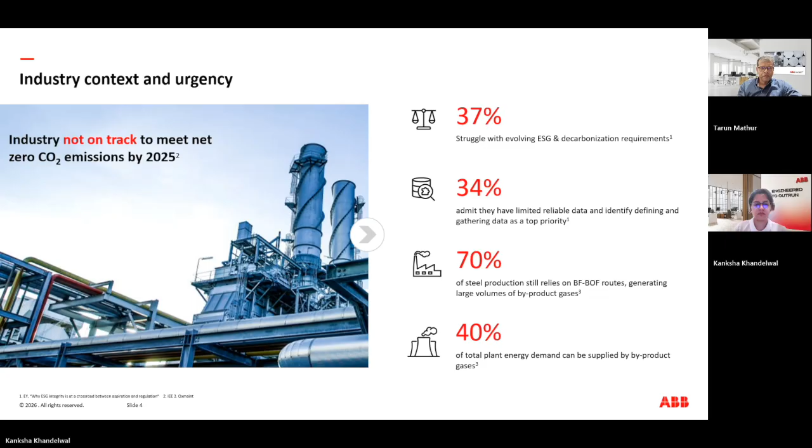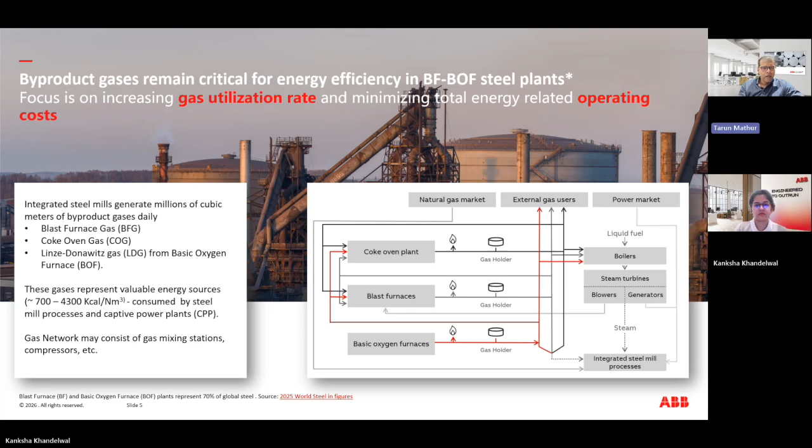The objective is simple: utilize as much internally generated gas as possible and minimize dependence on purchased fuels and electricity. However, gas generation and consumption are constantly changing based on process conditions and the periodic events that happen during the processes. This makes balancing the network a highly dynamic problem, and that brings us to the value leakage that exists in most plants today.

At the core, all value loss comes from one issue: imbalance between gas generation and consumption. This can happen in a couple of ways. One case is excess supply, when generation exceeds demand, gas holder levels rise, pressure increases in the network, and eventually gas has to be flared. This leads to direct loss of useful energy, which has to be replaced by purchased fuel, and it results in higher emissions as well.

Case two is a shortage of gas. When the gas supply is insufficient, the plant switches to natural gas or LPG, and this results in higher and volatile energy cost or a suboptimal fuel mix. Importantly, this can happen even in plants that flare gas at certain times, while at other times they have to use purchased fuels as well.

On top of this, decisions are mostly manual, based on operator experience and limited visibility across the network, which leads to delayed response, conservative decisions, and suboptimal gas allocation. So overall, value is lost through flaring in excess gas scenarios, fuel purchase during shortage, and inefficient decision making in between.

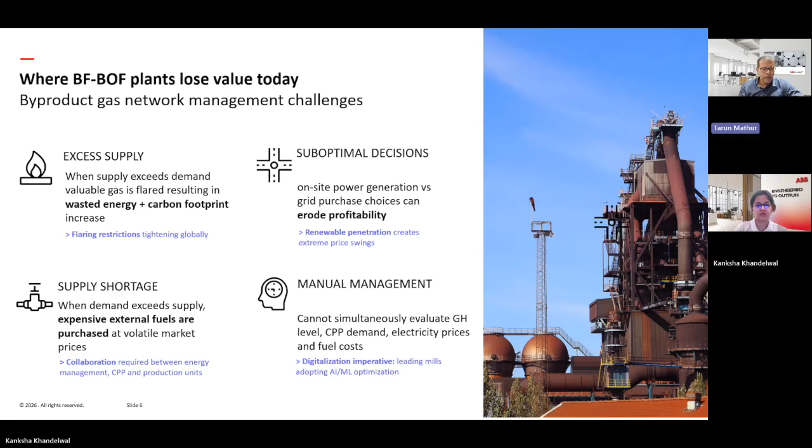Let's have a look at some real-world scenarios and how this happens in real time. Scenario one is when a blast furnace gas holder is approaching its upper limit, network pressure is rising, and multiple captive power plants are available. Traditionally, operators react after the problem becomes visible in the process parameters. But with forecasting and optimization, the system can predict excess gas availability in advance and recommend the optimal destination or distribution for the gases before flaring.

Scenario two is similar, but due to stove changeover, which is a periodic phenomenon in a blast furnace, gas demand changes suddenly, affecting network pressure and the gas mixing station settings. Instead of waiting for disturbances to happen, the gas network optimization system forecasts the impact in advance and recommends the new optimal operating point.

Scenario three is on the other side, on the demand side, when an unexpected process interruption occurs. For example, a reheating furnace suddenly reduces consumption due to various reasons, and the gas demand drops immediately. Again, the system forecasts the resulting imbalance and identifies the best utilization strategy for the excess gas. So these examples may appear simple, but when hundreds of such events occur across a plant every day, optimization becomes extremely difficult without digital assistance.

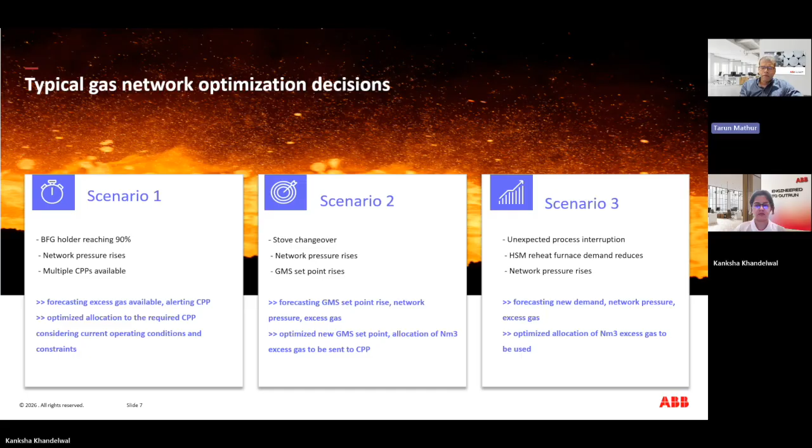So how do we turn these complex decisions into actionable recommendations? For that, I'll hand over to my colleague Kanksha, who will walk us through ABB's approach to gas network optimization.

Thank you, Tarun. The scenarios we just discussed highlight a common challenge across integrated steel plants, right? The gas generation and consumption are continuously changing, and operators need to balance multiple variables in real time. So the real question is, how do we move from reacting to events to anticipating and optimizing them ahead of time? So for that, first we need visibility. We must understand what is happening across the network.

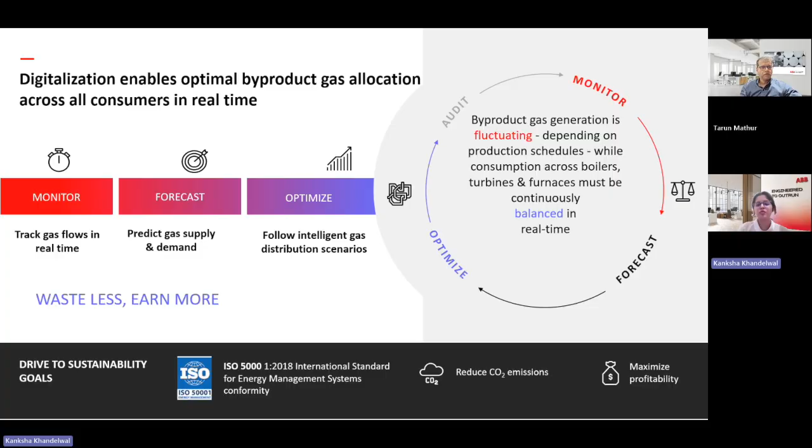Second, we need forecasting. We must anticipate future gas generation, demand, and network conditions. And third, we need optimization. We need a system that continuously determines the best allocation strategy, considering all operational and economic constraints. So let's briefly see how each of these modules contributes to solving the problem that we just discussed.

ABB Ability EMS delivers gas network optimization through three closely connected modules. Let's start with monitoring and reporting. This module creates a single source of truth for the gas network. It continuously tracks the gas generation, the gas consumption, network pressures, CPP performance. Now, this provides the operators with complete visibility into what's happening across the network and eliminates the need to rely on multiple disconnected systems. But monitoring alone is not enough, right? It still remains reactive in nature.

So that brings us to the second module, which is forecasting. This uses AI ML, and the system learns from the historical operating patterns and continuously predicts the gas generation, gas demand, and potential excess or shortage kind of situations that Tarun just mentioned. This allows the plants to move from reactive management to proactive planning.

The third module is optimization. This module transforms forecasts into actionable recommendations. So it continuously evaluates different operating scenarios and determines where the excess gas should be sent or which CPP should consume the gas, whether the gas should be stored or utilized immediately, etc.

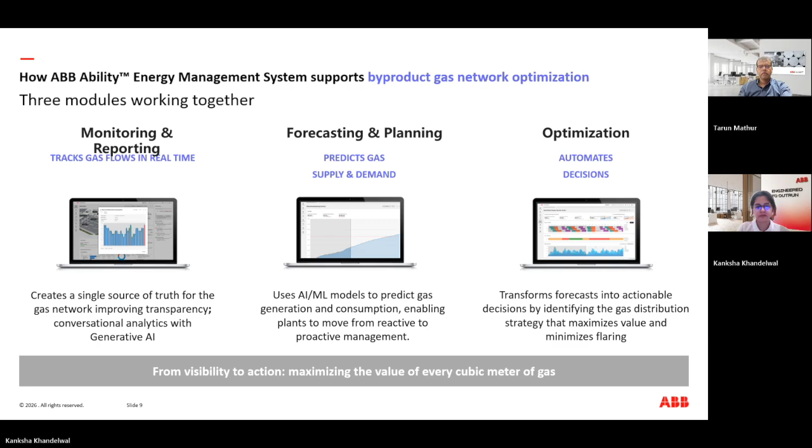So in summary, monitoring tells us what is happening, forecasting tells us what is likely to happen, and optimization tells us what should be done about it. So once these modules are in place, the impact is very tangible. In fact, if you recall Mr. Agrawal's message at the beginning of the session, he emphasized that effective management of byproduct gases is not only an energy challenge, but also an operational and business challenge. And that's exactly where the value of GNO comes from.

Let's look at the benefits across four dimensions, right? Starting with the financial impact. Every cubic meter of gas that is recovered and utilized effectively is a cubic meter that doesn't have to be replaced with purchased fuel or electricity. So the plants can reduce the dependence on external energy sources.

They can better utilize the excess gases and reduce the costs associated with process disruptions and energy imbalances. So in simple terms, the plant can extract more value from assets and energy resources it already has.

The second area is operations. The gas management decisions involve multiple stakeholders, from the EMD or the energy management department and the captive power plants to the production units, right? A common challenge is that everyone sees only a part of the picture. So by creating a shared view of the network and providing forward-looking recommendations, EMS improves this collaboration, supports better planning, and helps teams to prepare for abnormal situations before they become operational problems.

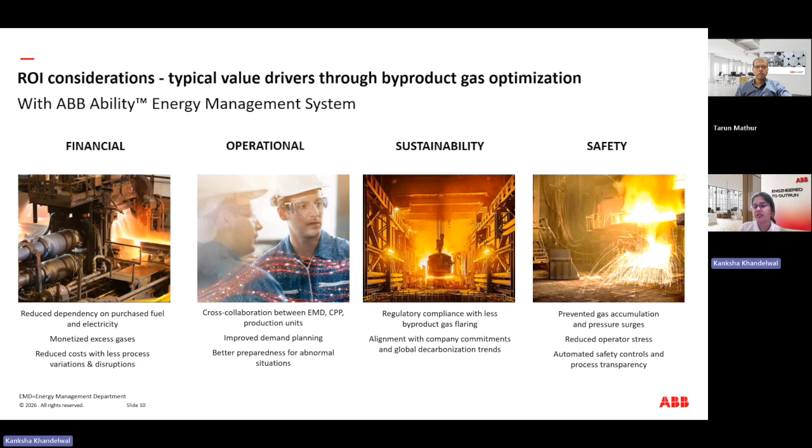Now, to make this more concrete, let's look at a real-world example where these principles have been applied. This reference comes from the Fos-sur-Mer steel plant in France, one of the largest industrial sites in the country, with an annual steel production capacity of approximately 4.5 MTPA. Like many integrated BF-BOF steel plants, the site operates a complex energy ecosystem that involves the blast furnace gas, coke oven gas, LD gas, captive power generation, and multiple energy consumers across the plant.

And managing this network is challenging because the gas generation, power demand, and the energy prices are constantly changing. They are exposed to the open energy market there. The objective at the site was not simply to reduce the flaring. It was to continuously determine the most economical use of available byproduct gases while balancing the gas holder levels, CPP operation, the electricity market conditions, its own internal energy demand, and the fuel substitution opportunities. So ABB implemented EMS that continuously evaluated these variables and supported the gas dispatching decisions in real time.

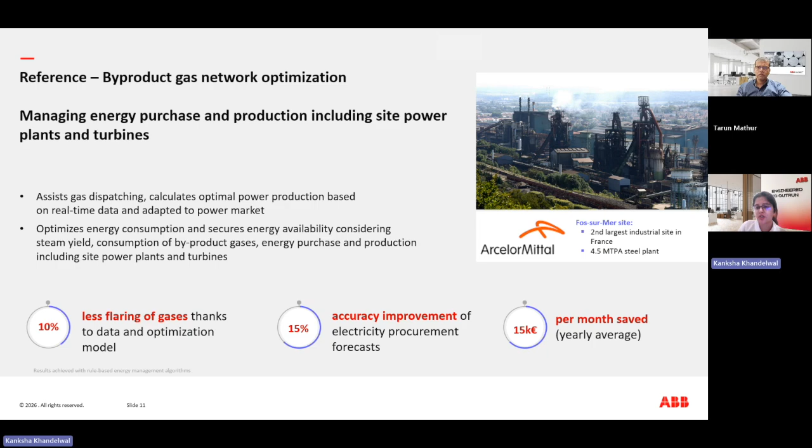As a result, the site achieved approximately 10% reduction in the gas flaring, meaning more byproduct gas was converted into useful energy rather than getting wasted. Around 15% improvement in electricity procurement forecasting accuracy. And of course, that led to the plant making better energy purchasing decisions, and an average saving of approximately 15k euros per month through improved utilization of the available energy resources. This is more than a decade back. So at this point, let's take a look at the EMS solution in action.

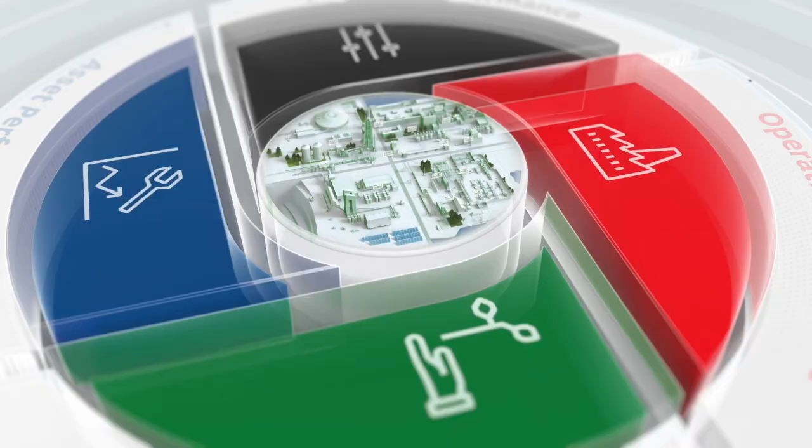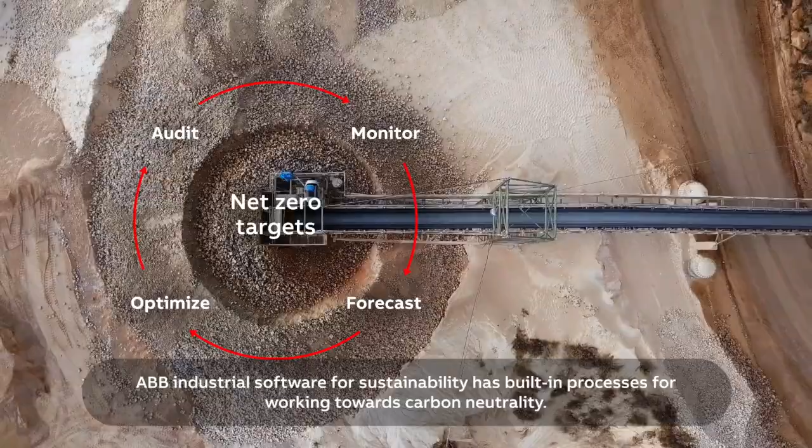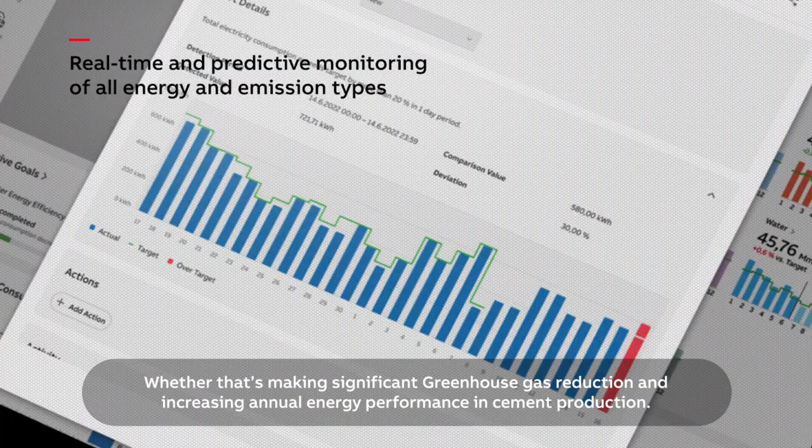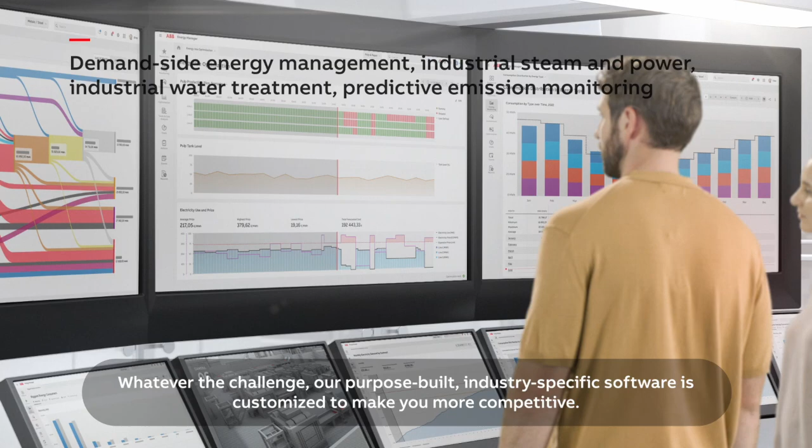Every industry needs to use energy and water more sustainably. Yet no two businesses use them the same way. ABB Industrial Software for Sustainability has built-in processes for working towards carbon neutrality. By showing you the real financial and environmental impact of your operations, you can set realistic targets, reduce risks, and achieve more. Whether that's making significant greenhouse gas reduction and increasing annual energy performance in cement production, predicting deviations from energy contracts, emission limits, and better planning, shifting your paper production to times when energy is cheaper, or digitally orchestrating complex distribution networks for your steel business for electricity, steam, and byproduct gases. Whatever the challenge, our purpose-built, industry-specific software is customized to make you more competitive. And the very same digital infrastructure forms the foundation for your cybersecurity and future improvements. So you meet and exceed your goals year after year. ABB Industrial Software for Sustainability. Solutions that revolve around you.

Okay, so that brings us to the end of today's session. To summarize, byproduct gases remain one of the most valuable energy resources in the integrated steel plants. Gas network balancing is becoming increasingly complex. The manual decision making is no longer sufficient for that. AI-enabled monitoring, forecasting, and optimization can significantly improve gas utilization while reducing flaring costs and emissions.